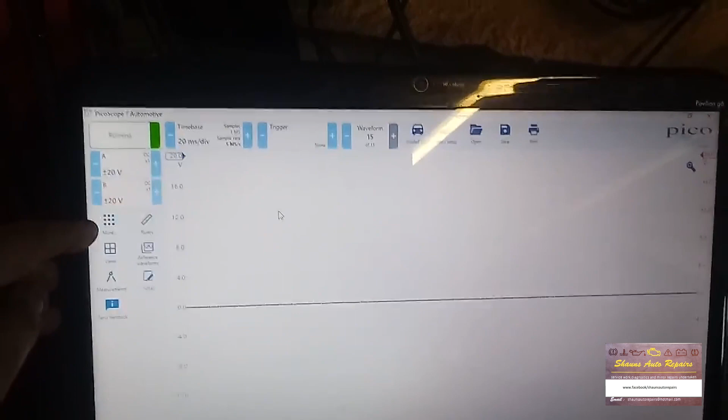Channel A and channel B. Obviously if this is a 4-channel scope, you'd have channel C and channel D down there as well, so it doesn't put those on.

Quite noticeable differences, as you can see. At the top there, let's just turn that off. Let's put that running. Right, so at the top there we've got the start stop button, which is normally down at the bottom in a little tiny box, so that's much improved.

We've got a time base button option up there for changing your time base, and also as part of that option, you can also change your sampling rate. Along the top there you've got a trigger setting for setting your triggers, and this is your waveform count now.

And coming down this side, if you click on channel A, it gives you the option of changing your voltages. The next box along, probes, allows you to change your probes, and you've got a very easy selection of all your different automotive probes. I haven't put nothing in there that's not automotive.

The next box along is your display box, where you can activate your filters and you can change the resolution enhance, which cleans up the signal that you've just captured. And the next box along, the display box, you can change the color of your channel, you can rename it, and you can change your scaling as well.

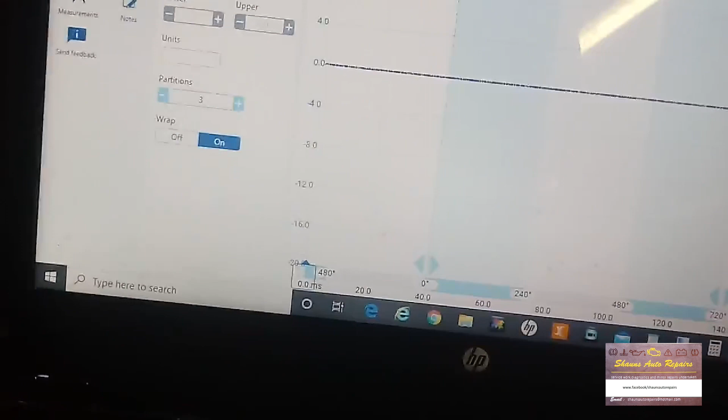And then, like before, you can come across here and you can change the amount of rulers that you've got in your box for the amount of cylinders that you have, and you can change your degrees for 360 degrees, 720, or you've got a custom box for customization.

So let's turn those off, we don't need those on. And then to get rid of that, we just click on the rulers box again.

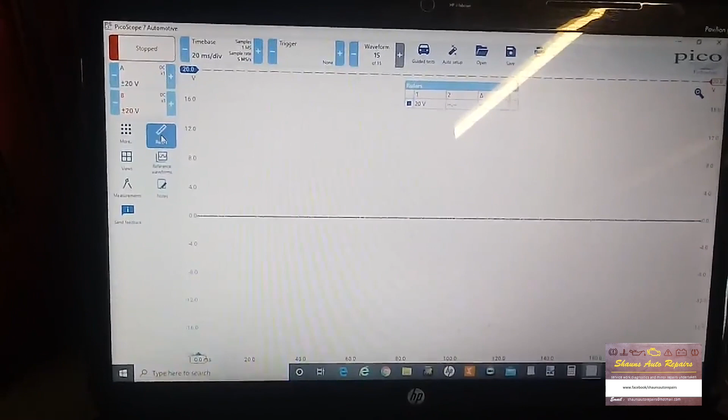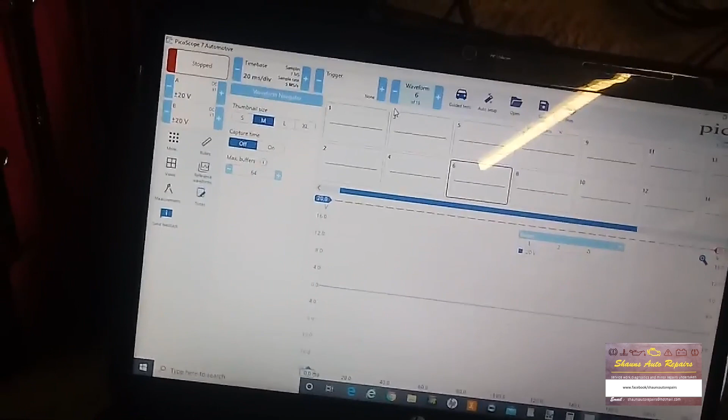After you've got your capture, to view all the different pages of capture you've got, you click on the top back box, the waveform box. It gives you all your waveforms up there, and you can scroll along and get all your waveforms, and just click on the one you want and it will display in the box at the bottom. So that's nice and clear, and you click on it again to get rid of them. Or you click on the X, there you go, little X at the top.

And as before, I think you'll find hitting the space bar. If you watch at the top there, the space bar will start and stop it.

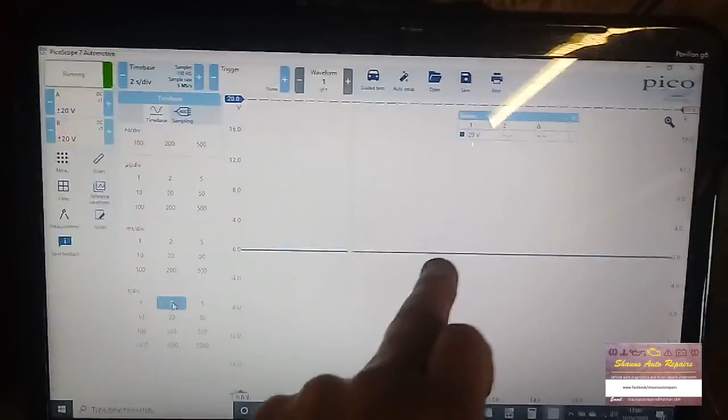And a nice feature that I think is good is if we take our time base down to something quite slow, 200 milliseconds. Let's go a bit slower. At the start, you've got a ruler that goes up from top to bottom, follows the line across, because unlike the old Pico 6 automotive software, where it just erases the screen before it draws another one, this one draws over the top of the previous one. So as you can see, the bar's coming along, but it's drawing over the old scaling, which I think is a very good feature. But when you stop it, it just cuts off and displays the screen capture that you got at the time.

Right, so I think that's all for now. What we're going to do is connect it up to the battery and do a relative compression or a battery test, and we'll see how that goes.

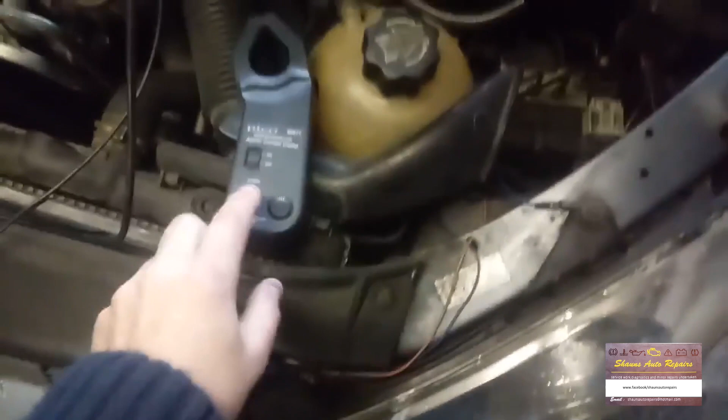Right, we're over at the car, just connected up a couple of leads. What we're using today is the Pico 4000 series, it's the 4223, the 2-channel 4000 series scope. On channel A we've got the 12 volt leads, positive and negative on the battery for doing battery voltage, and on channel B we've got the 600 amp clamp, which we're going to put around the battery terminal to take the ampage from the battery, so we can get a battery test, a battery voltage and a current draw from the starter.

So we come over to the Pico software, and from the front page we've clicked on guided tests. We could put this in manually, but let's see what the guided tests do for us. So we'll go on to charging and starting.

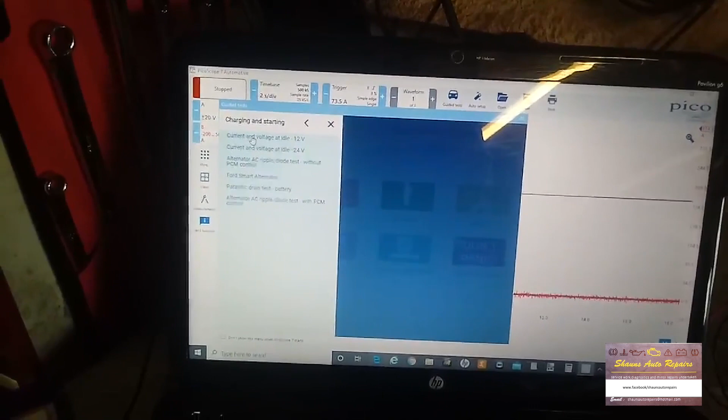We don't want relative compression. We go on to charging and starting. So we've got current and voltage at idle 12 volt, current and voltage at idle 24 volt, alternator ripple diode test without PCM control, Ford smart alternator parasitic drain test, that's probably quite handy, and alternator AC ripple diode test with PCM control.

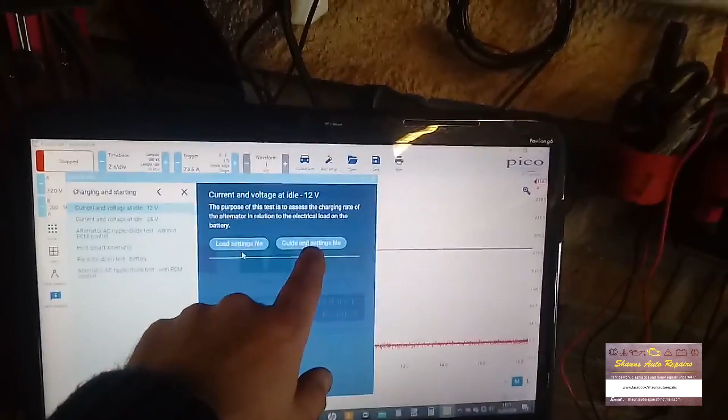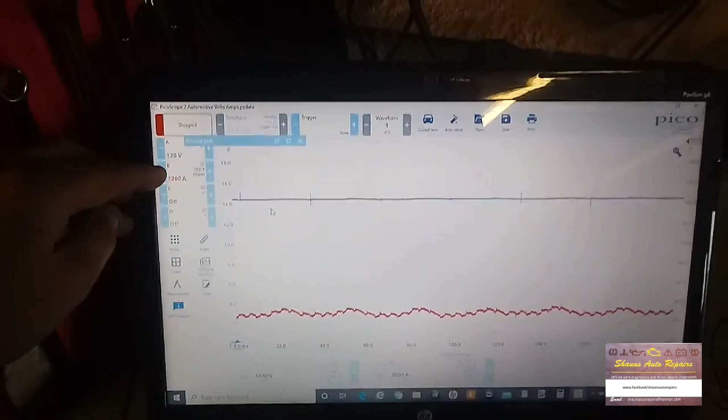So we go for current and voltage at idle 12 volt, and then it gives you two options: to directly load the settings file, or to load the settings file and give you a guided tour of what it does and how to set the scope up. We'll go directly into load settings file, and as you can see, it's set the scope up pretty much straight away. On channel A it's giving me a 20 volt range, and on B it's given me a 200 amp plus or minus range for the amp clamp.

So first of all, we'll change that. We'll change the 200 up to 500 because we're going to need a bit of a peak start, and we'll move that up, just moving the scaling up on the side so we can see the waveform there at the bottom, and we'll put it up the screen a little bit.

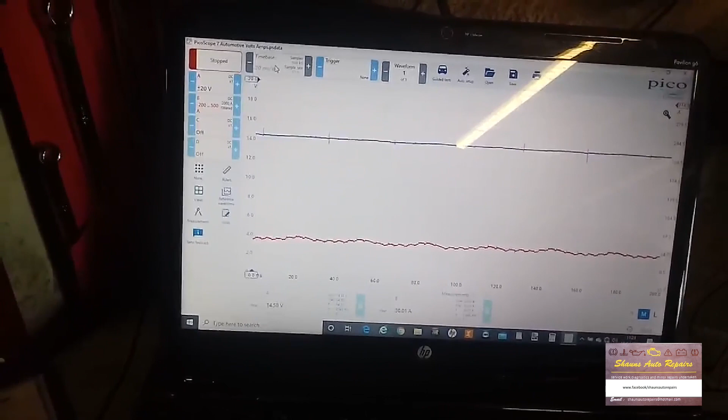Right, so we'll get rid of that. Time base. Why can't we change the time base? 20 seconds, we don't want 20 seconds, do we? Perhaps it won't let you change the time base. Right, okay. Right, it doesn't seem to want to let us.

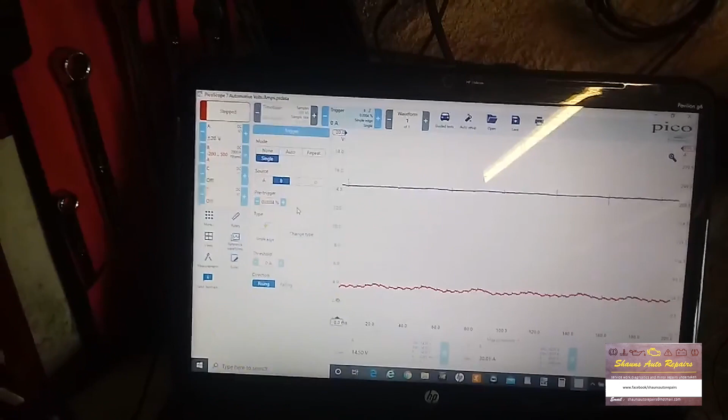We'll put a trigger on. We'll put a trigger on channel B, single trigger, channel B, click on that again, and where's our little diamond? Our little diamond is down there, so we'll bring that up. We'll put that about 50-60 amps, somewhere around there.

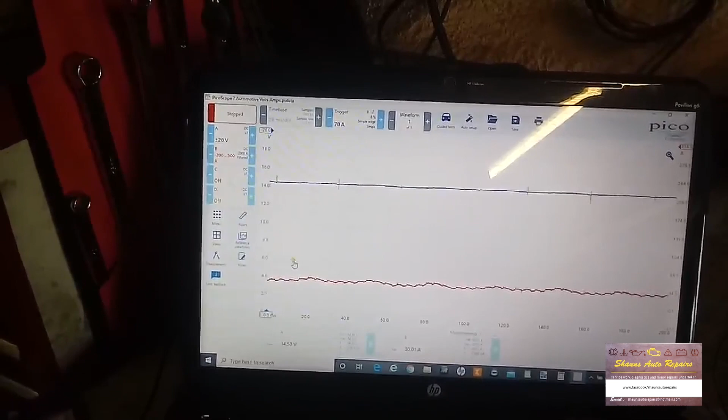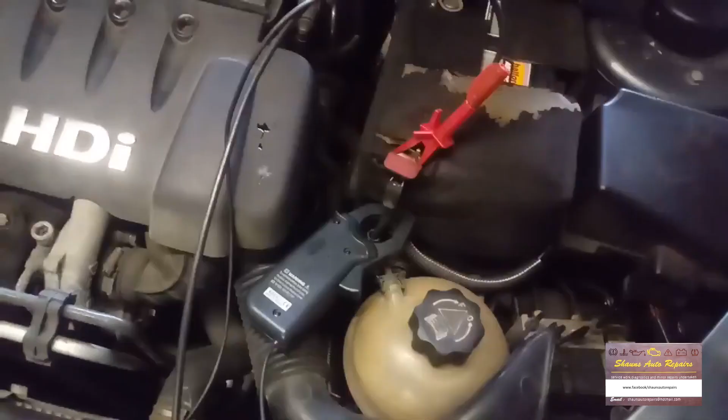Right, let's put our amp clamp on our battery. Just got to put the phone down for a second. Right, switch the amp clamp on.

Put it on the battery main cable. I think it's on the right way, the arrow is pointing to the positive. Right, let's start this test.

What it should do is run up to the trigger mark, but for some reason when I'm using a trigger, even on the old Pico 6 software, it's a bit hesitant. Oh look, it's allowing us to do it, let's turn that off.

It's allowing us to change the time base now, so we'll change that to a 2 second per division screen, which gives us a 20 second screen, and we'll start that again.

See, now it runs up to the trigger mark and is waiting for a high amp input to go past the trigger to let it run. So we'll crank it over and start it, and hopefully it'll go the right way.

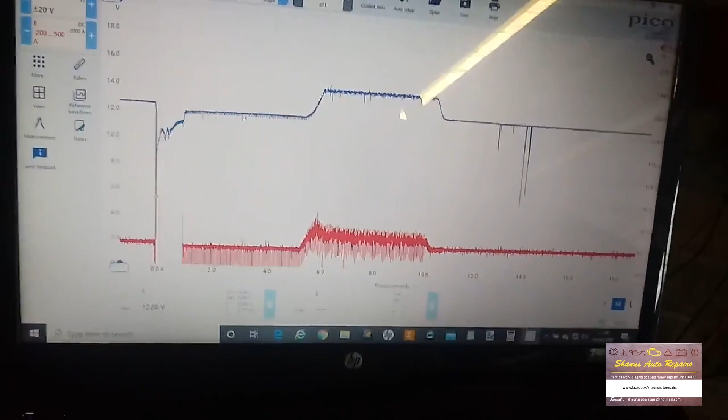We'll leave it a few seconds and turn that off, and then you'll see it run to the end of the screen, and it will stop. So that's good, it stops at the top there.

So now we can clean these channels up. If we click into channel B, and go into display at the top there, we've got a choice of low pass filtering or resolution enhance.

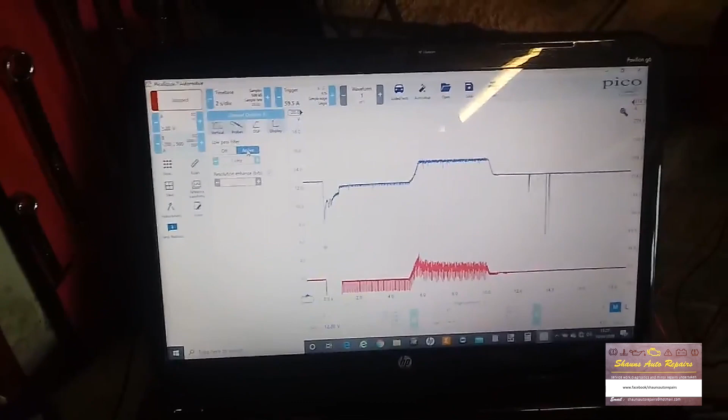If we click the low pass filtering, it cleans it up a little bit, but let's just turn that off. But if we increase the resolution, that cleans it up a lot better.

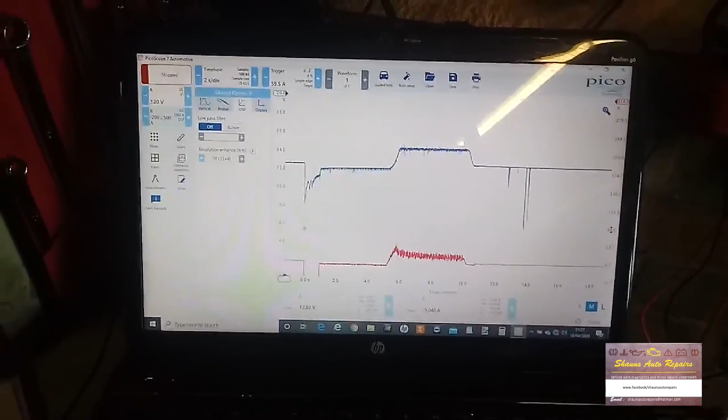Alright, so if we go over to our scaling and bring that up, but as you can see, rookie mistake number one, the amp clamp's on the wrong way around.

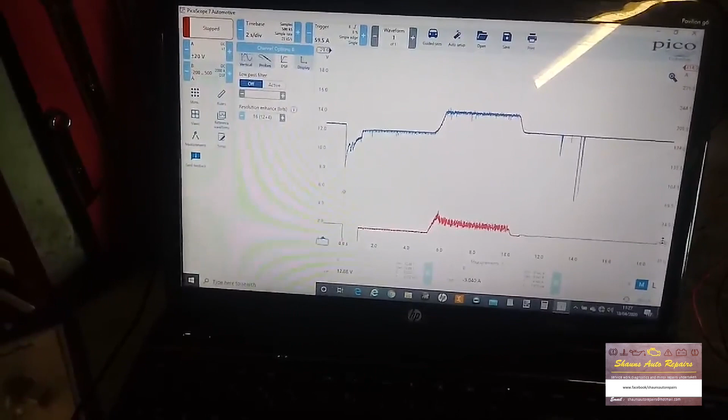Right, so let us do that again. One moment please. Right, amp clamp is now turned around.

We'll start that again. So it runs over the top of the old pattern up to the trigger mark. We'll start the car again. We'll let that run for a second or two, and then we'll turn that off.

Right, that is a more interesting pattern. So we'll bring the amps back down.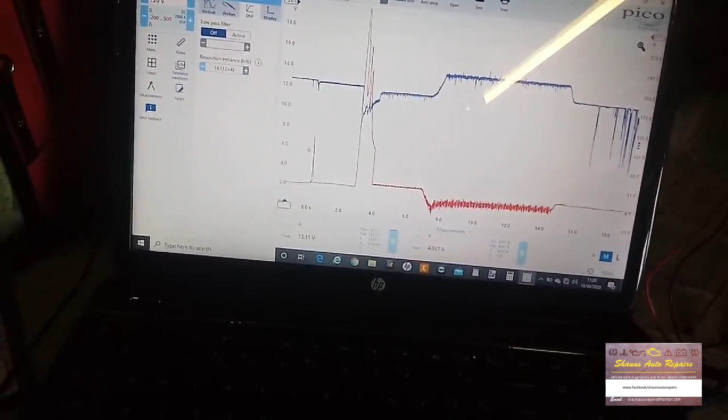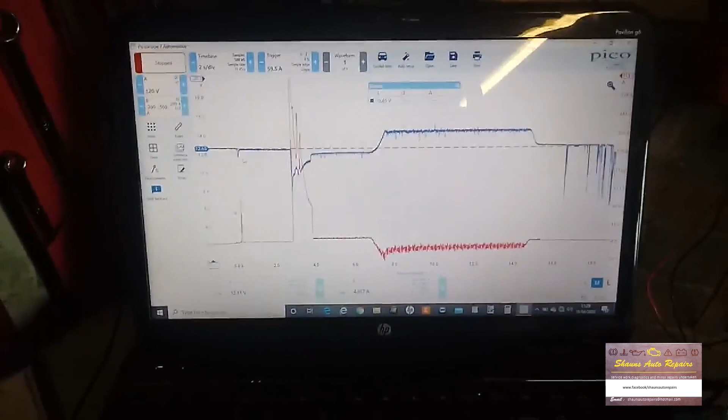And you can see when we first started, if we bring our rulers down, you can see right, before we started our battery voltage was 12.65, and when we cranked it, it dropped right down to the lowest, which was 8.182 volts. I know this battery is a little bit weak, so you wouldn't really want it to drop under about 10.5 volts.

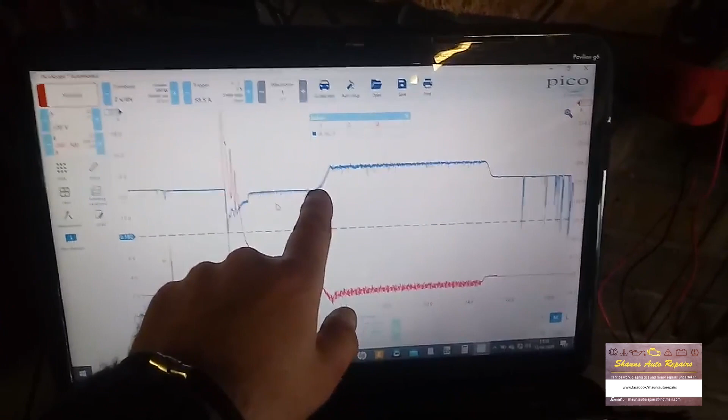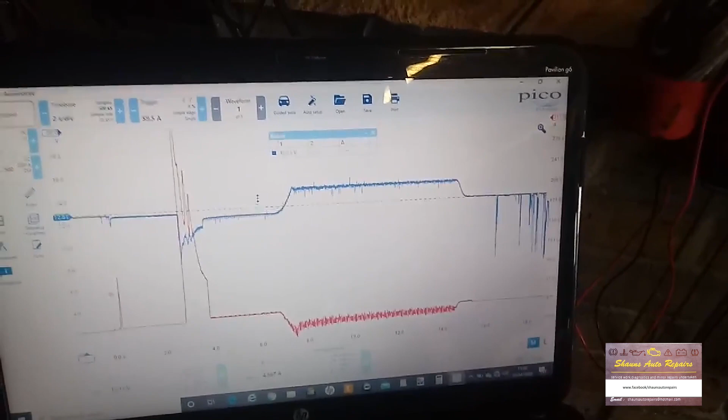And then it's cranking, and then it starts at this point here. So it's crank, then starts, and then about a second or two later the voltage rises up to a charging position, and if we put our scale at the top there, it's then charging at 14.27 volts, which is a good healthy charge rate, until we turn it off and it drops down to normal battery.

Alright, so we can measure the time. If we bring these markers along from the bottom, if we put the first marker where we first started cranking, and the second marker, we want to go here.

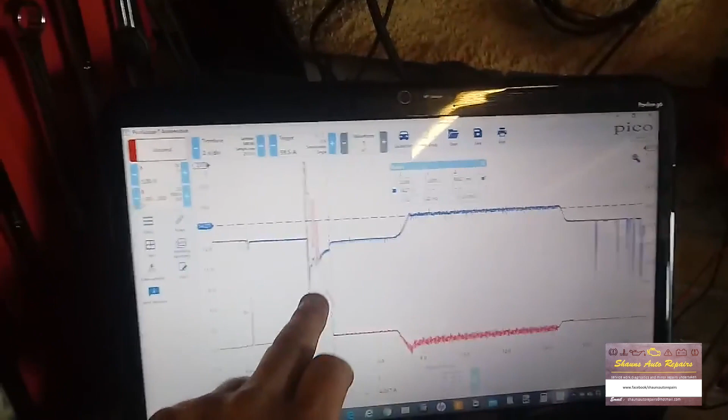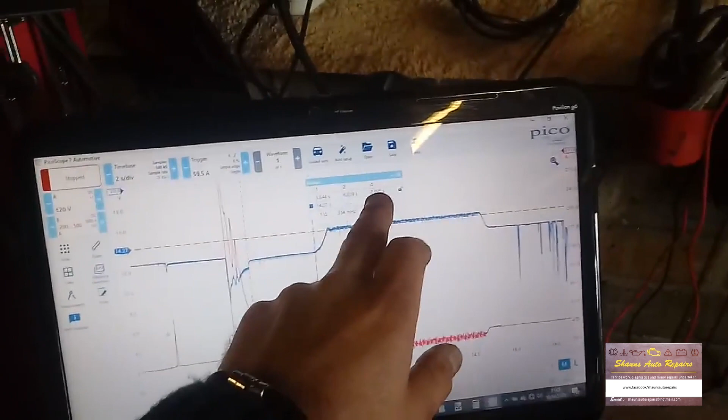Right, so in between when we started to crank and when it started, we had a delta time of 980.7 milliseconds, so under a second to start, quick crank, and then it starts, and then we have a period of just under 3 seconds before the alternator kicks in and then starts charging, and then away it goes.

So if we put these markers back again, put them back over there, right, so now we can do the same with the amp ruler. We can bring that down from the top right hand corner, and if we move our scaling down so we can see the peak of when it started.

Which is right up here, you can see on initial crank we had a peak of 495 amps, and then it quickly went down.

Let's get that ruler down there so we can bring the scaling back up so we can see our waveform.

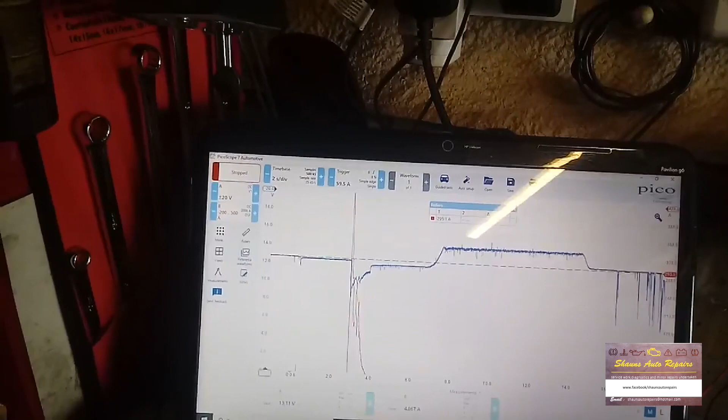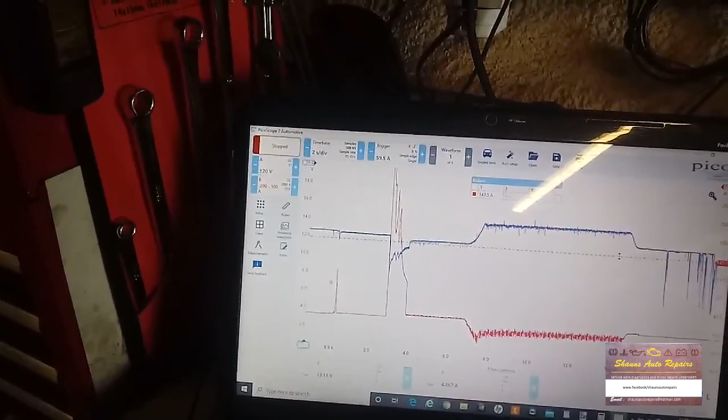See, at this point where it was cranking, it came down to roughly an average of 200 amps until at this point it started.

So we had a period of zero charge rate, or it was discharging at 7 amps. So about 7 amps. The amp clamp might not have been completely zeroed out at the start.

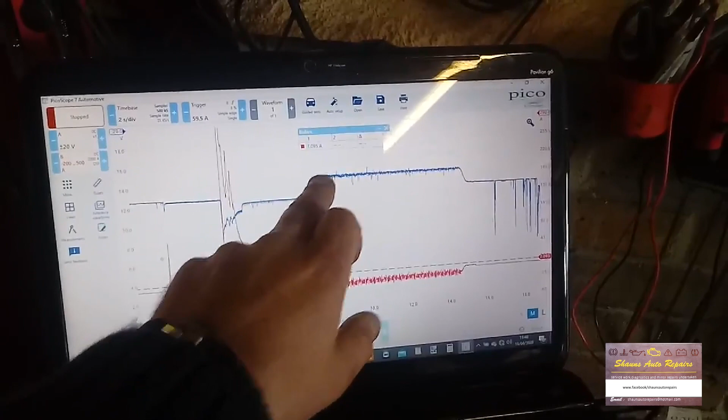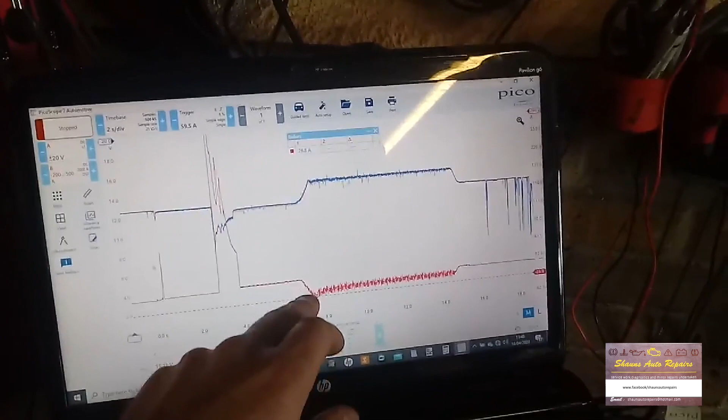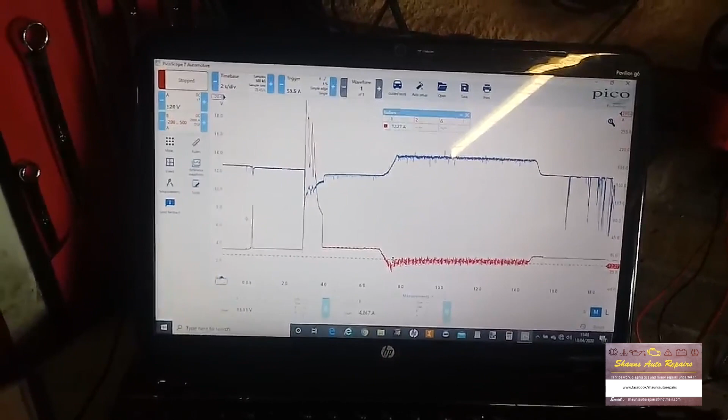And then when the alternator kicks in, when the voltage goes up, you see that it comes down, it's actually run the wrong way, but it's actually charging at 26 amps, and then averages out at about 12 amps, which isn't too bad for the battery. I know the battery isn't a lot good.

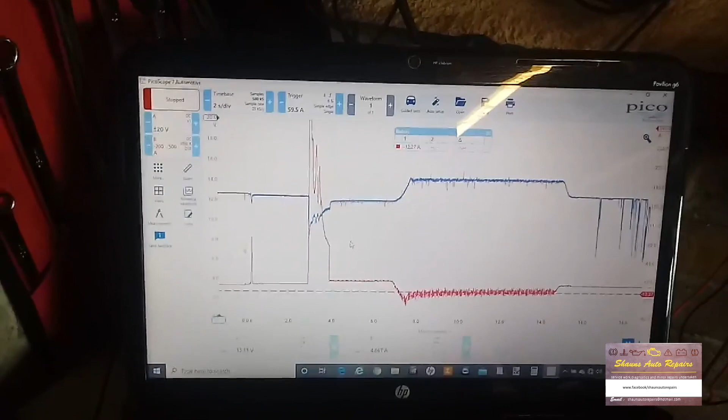Right, so that's for that. So what we'll do now, we'll go in and I'll take the amp clamp off, and we'll have a quick look at something else. We'll have a look at cam, get a waveform off the cam sensor.

Right, we're back over at the car. We've taken the amp clamp off. We've still got the negative lead of channel 1 on the battery negative, and now we've got the positive of the channel 1 probe in the camshaft, I think it's center wire, which I believe is the signal wire.

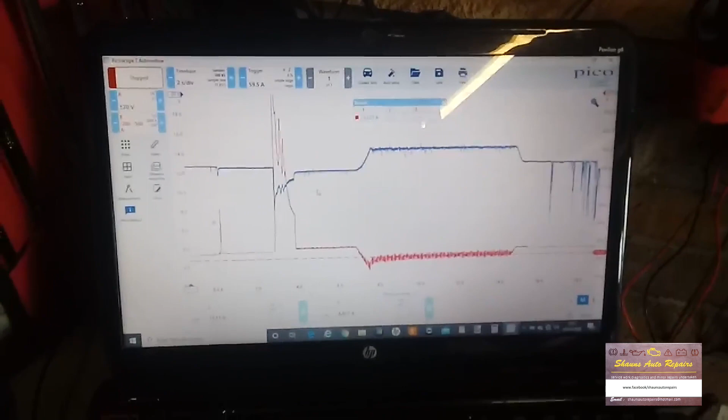So we'll come over to the Pico. Let's go to the guided test again. We'll come out of there.

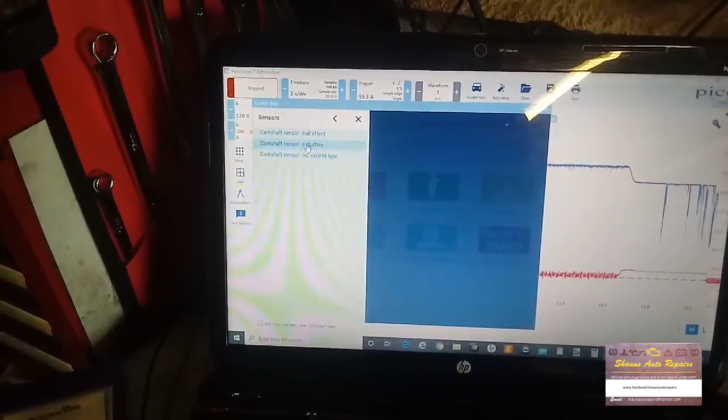Sensors, actuators, ignition. We're going to sensors. Camshaft, let's click on camshaft. Camshaft Hall effect, we'll click on Hall effect. Load settings.

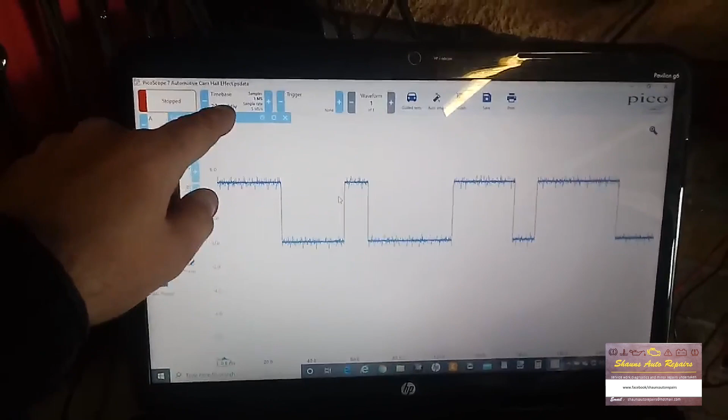That gives us a waveform of what we should be looking for. It gives us a 10 volt scale, and 20 milliseconds per division on the time base.

Right, let's start that off, and we'll start the car and we'll see what we get.

Nothing, so we must be on the wrong wire. Hang on a second.

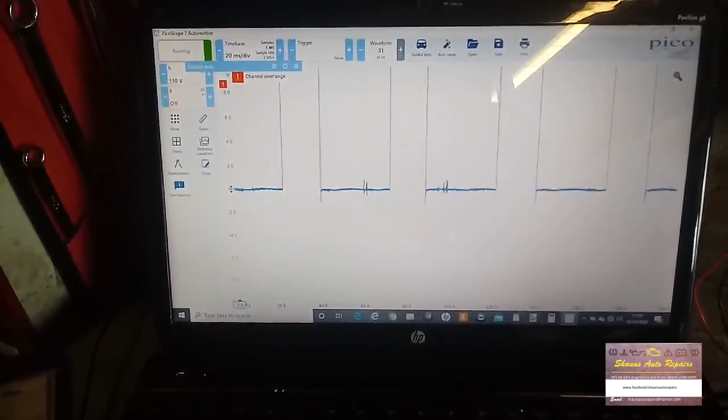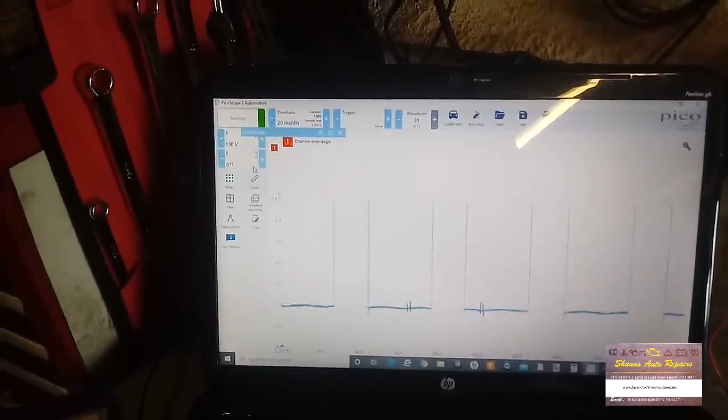We'll change this at the top here. Let's get rid of that. We'll change our voltage to 20 volts, and that gives us our camshaft square waveform.

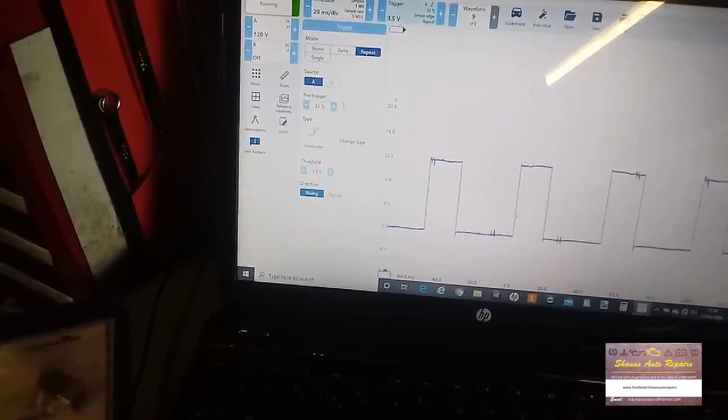We'll put a trigger in. Repeat trigger, channel A, and there you can see the trigger's holding our pattern nice and steady.

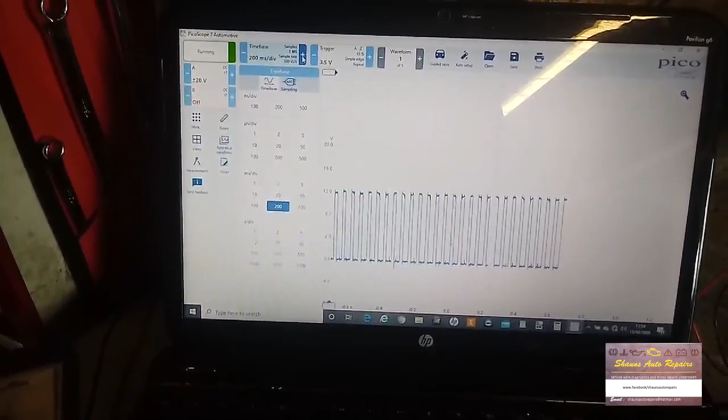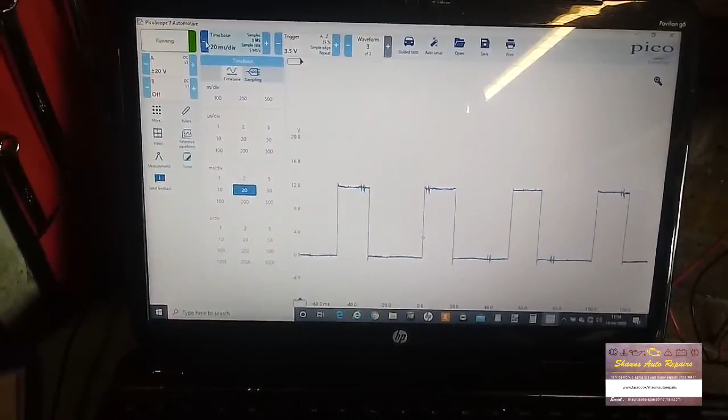We can increase our time base to get more in, or we can slow it down. And then we can stop it, and I'll turn the car off.

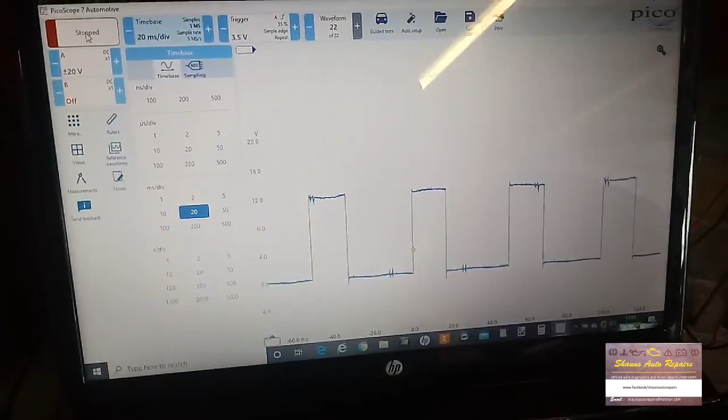Now to examine the pattern, we can use this new zoom feature. All the zoom features were at the top here, and it's now gone to one zoom button at the top there. So we click on that,

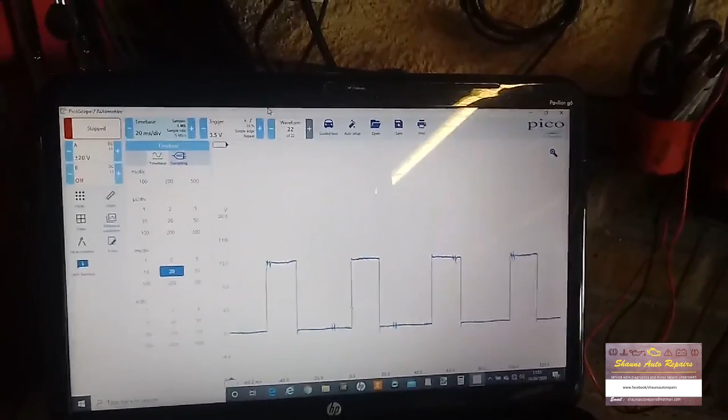and that gives us a cross on the screen. Then we can just click and drag the area that we want to examine, and it enlarges it into a big screen.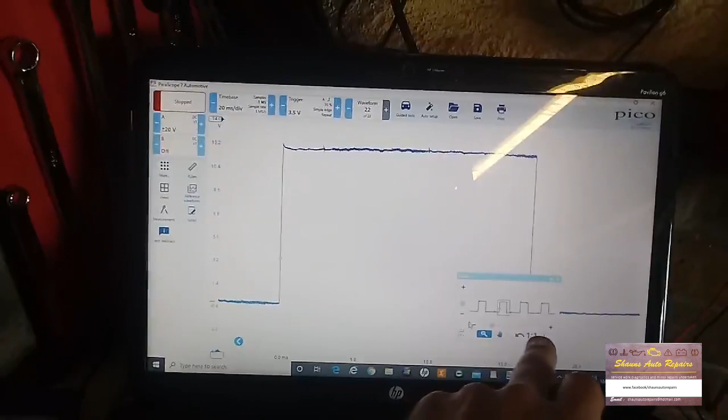Then there's some helpful features at the bottom here in this bottom box. You've got plus and minus zoom levels, so you can zoom up and down vertically, or you can zoom plus and minus horizontally to get more or less into the screen that you like, which is a good feature, I think.

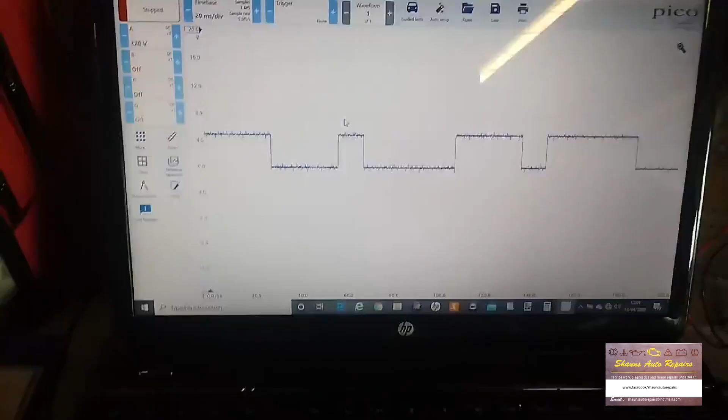And then you can press X to get rid of that and go back to the original. Right, so as a quick overview then, I think it's

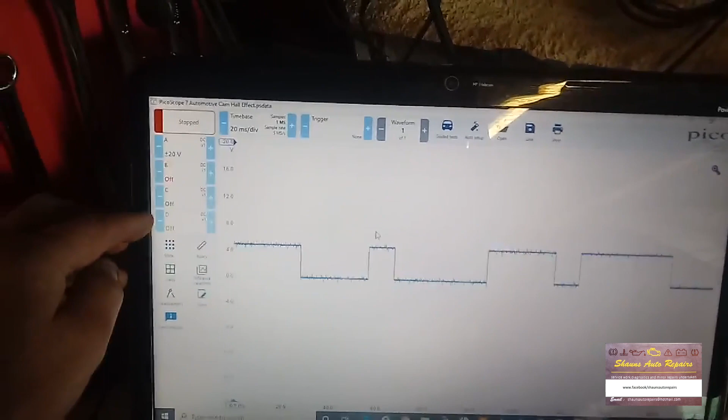probably better than Pico 6. It'll take a bit of using and getting used to where different things are, but the main thing is all the channels have gone from along the top to down the side here. Your start stop button has a big button now rather than a little button at the bottom.

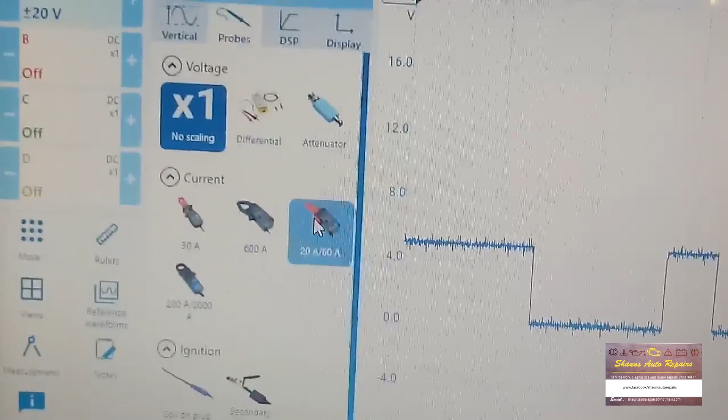Probe selection, when you click on your channel, is by clicking on probes. It's a far clearer menu. It gives you a picture of all your different probes, and when you're selecting your amp clamps, when you select your 20 or your 60 amp, it will give you the choice of 20 or 60.

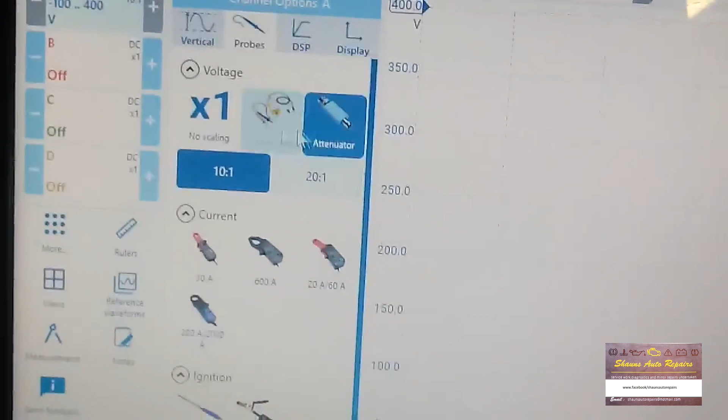It will give you all your different probes. When you click on the attenuator, it gives you a choice of 10 or 20 to 1. Much clearer than it was before.

Get rid of that. And as I say, you've got your trigger settings up there, your waveform patterns up there. Anytime you can click on your guided tests. You've got an auto setup, and then you can open and save all your waveforms as per usual.

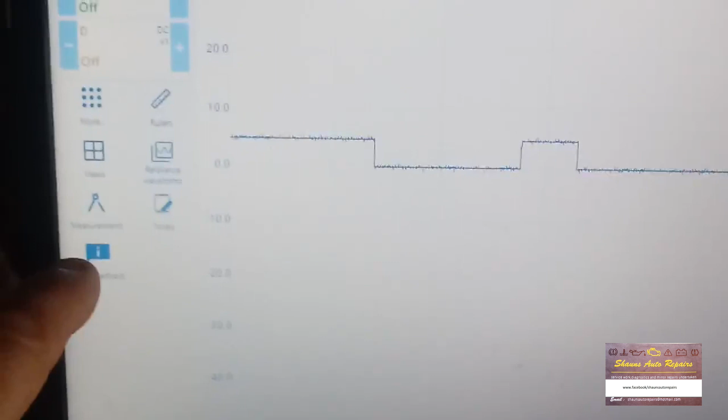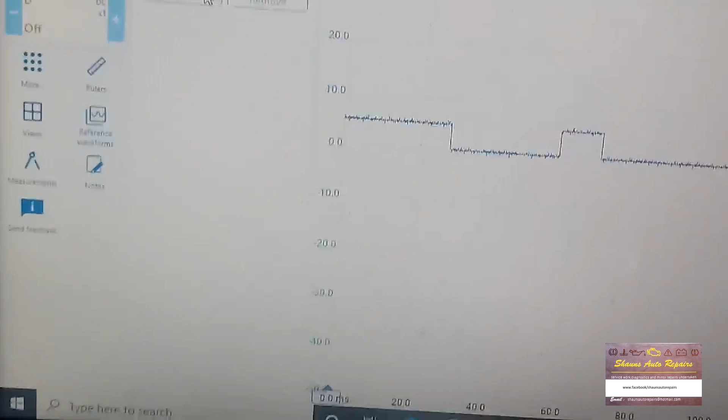You've got a send feedback option, so you can send feedback back to Pico. Notes, reference waveforms, you can click on there and you can add and manage all your reference waveforms. I don't know if that's working yet, I haven't tried that.

Get rid of that. As I say, the rulers, you can add your rulers along the bottom. You've got a more button, which gives you a brief outline of everything together. You've got a print option, so you can print your screen.

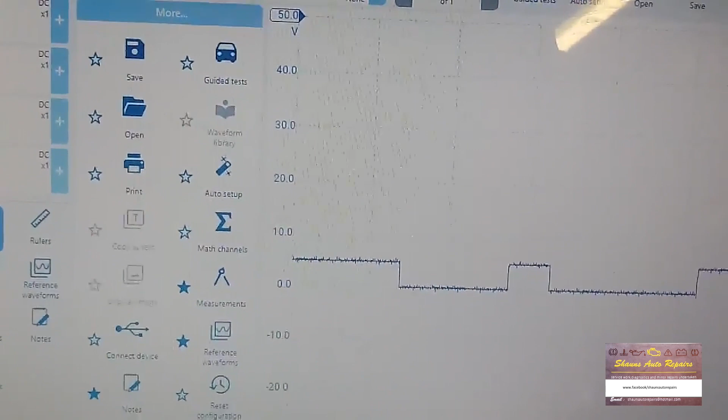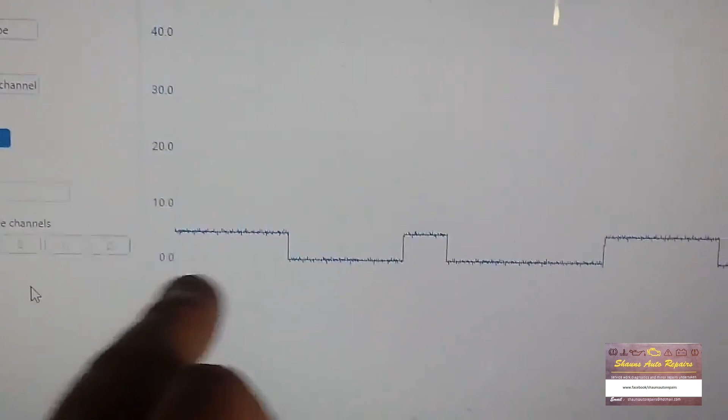What else have we got? When you go to views, you can switch all your channels off and on. So if you've got like a 2 or 4 screen pattern and you only want to look at one waveform, you can switch off all the other channels.

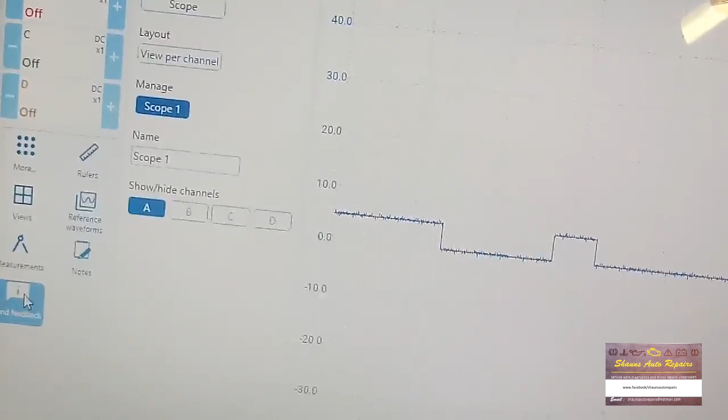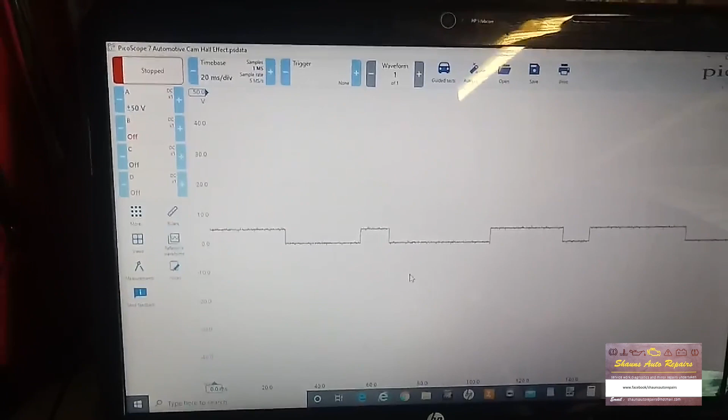I think that's it. I think it's going to be an improvement over the old Pico 6. So we'll give it a use, we'll give it a go, and you'll probably see me using this in future videos.